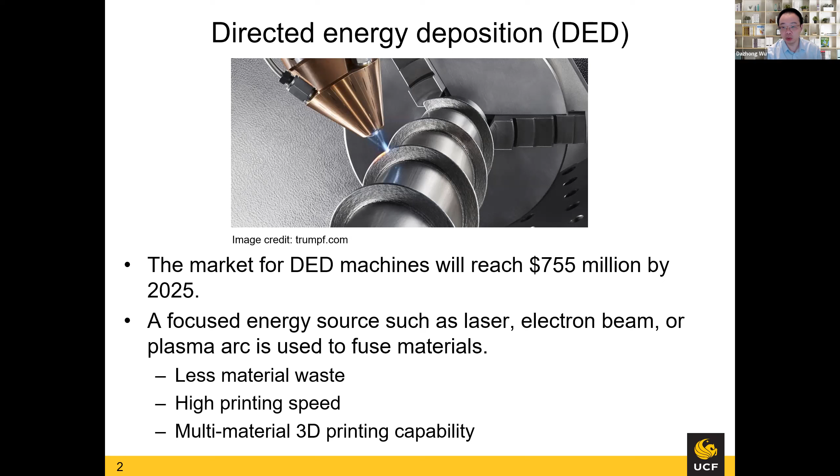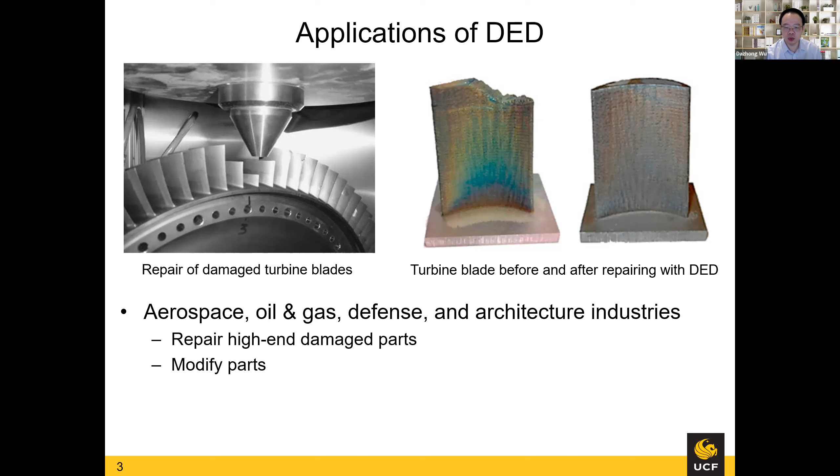There's a wide range of applications of directed energy deposition process. There are several industries where this process has been heavily or extensively used, including aerospace, oil and gas, defense, and architecture industries, because this process can repair very high-end, expensive, damaged parts, such as turbine blades, as you can see from these figures, before and after repairing with directed energy deposition. Also this technique can be used to modify parts more effectively and efficiently.

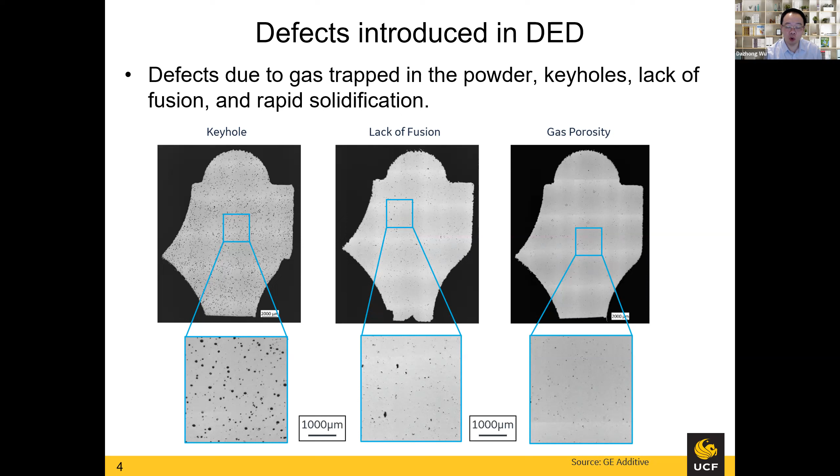However, there are also some disadvantages of this technology. For example, similar to other metal additive manufacturing processes, the DED process will introduce defects due to gas trapped in the metal powders, keyholes, lack of fusion, and rapid solidification. As you can see from these SEM images, sometimes even pretty large voids are introduced by this process.

As I mentioned before, these defects are affected by a so-called melt pool formation process during the DED process, such as melt pool temperature. This melt pool refers to the spherically shaped area in the vicinity of the laser and the metal or material interface, and there are several challenges associated with this process.

One challenge is that traditional or conventional physics-based models, such as finite element analysis, which you might be pretty familiar with, are usually not accurate enough to capture or detect these defects introduced by this process, due to the very complex heat and mass transfer phenomenon within a melt pool.

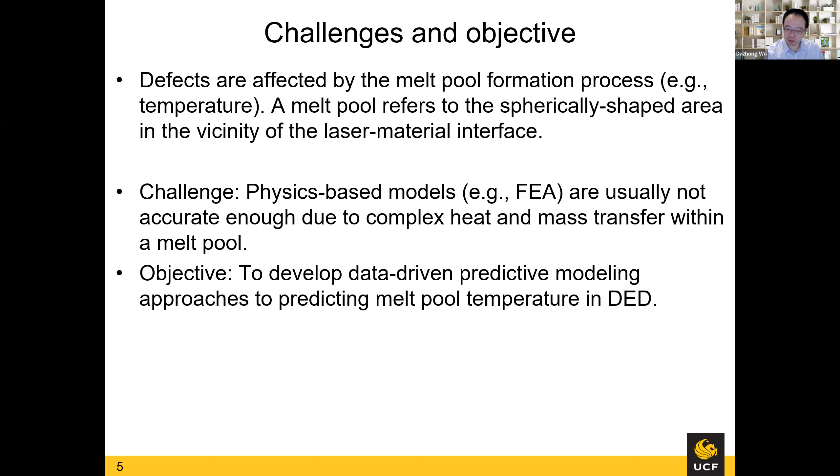Our objective for this project is to develop machine learning algorithms or data-driven predictive modeling approaches to predict melt pool temperature in real time. So I will briefly talk about two algorithms, machine learning algorithms we implemented and tested for this research.

The first one is called extreme gradient boost, or XGBoost. This is actually a tree model, so we grow hundreds or thousands of decision trees. These decision trees help us predict melt pool temperature, and this melt pool temperature will significantly affect defects, as I mentioned before.

The second algorithm is one of the deep learning algorithms. The previous one, XGBoost, is actually a machine learning algorithm. Long short-term memory, or LSTM, is one of the most effective deep learning algorithms. We chose to implement LSTM because it keeps track of long-term dependencies in time series data. The sensor data we collected is actually time series data. That's why we chose this deep learning algorithm rather than others, like CNN, convolutional neural network.

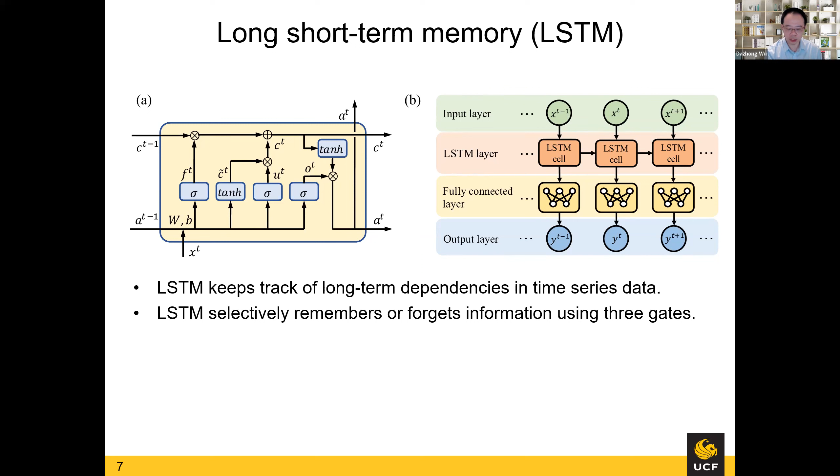We fabricated several specimens, so-called thin-walled structures, using this DED machine. The raw material of these structures is a nickel-based alloy, Inconel 718, which is very common in industry, and the substrate material is low-carbon steel. You can see from this figure the build direction from bottom to up, and also the implemented zigzag two-pass strategy.

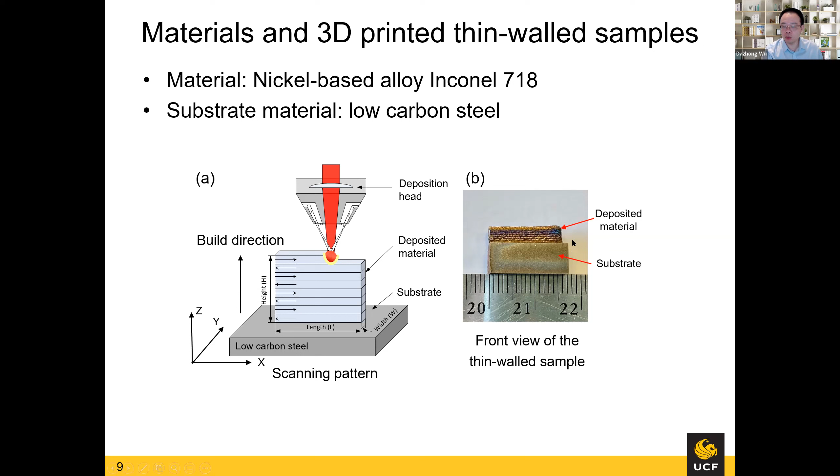In order to reduce the total number of experiments, we only varied these two key parameters: laser power and scan speed. These are the most important parameters that affect printing quality, which is why we only varied these two parameters.

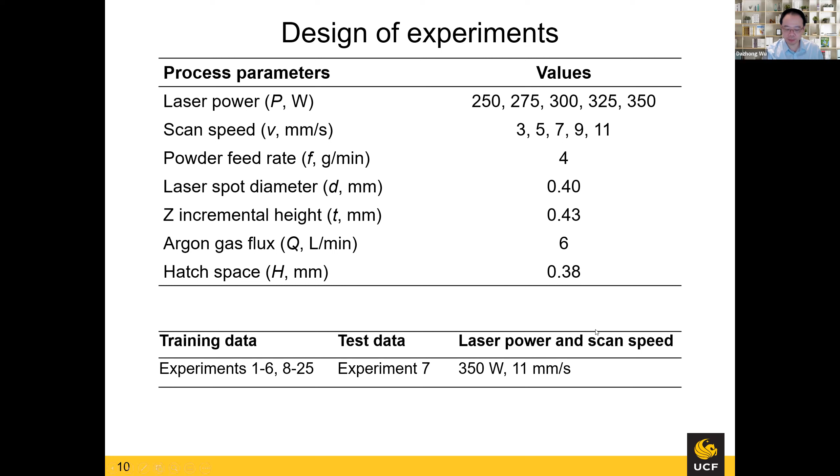We used 24 data sets to train our machine learning model, and then tested and validated the accuracy of this model using the remaining 1 data set, as you can see from this table at the bottom. And here are the experimental results.

Further, we quantify the prediction accuracy for these two algorithms in terms of root mean square error, RMSE, and mean absolute percentage error, MAPE. These are the two commonly used error metrics to quantify the accuracy of a machine learning algorithm. Further, we want to quantify or evaluate the training efficiency of these two algorithms and see how long it will take to train effective machine learning models.

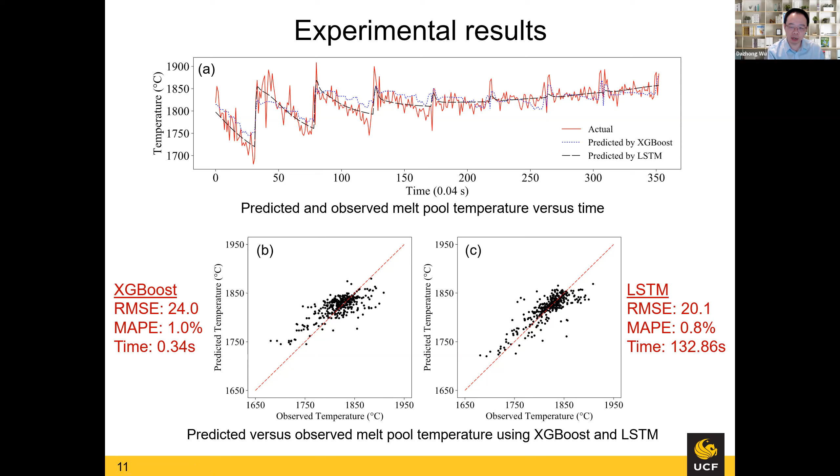If you take a closer look at these two figures, we plotted the predicted temperature versus observed actual melt pool temperature using these two algorithms, which is slightly different from the first plot. In terms of training efficiency, this deep learning algorithm, LSTM, takes longer time than XGBoost, although the prediction accuracy is slightly better or higher than XGBoost. So there's some trade-off you need to balance when you choose the right machine learning algorithm to train your model.

We further compared our prediction accuracy with state-of-art methods reported in the literature. Here I only list 3 references: a closed-form analytical model reported in reference 1, a finite element model, which is numerical, reported in reference 2, and another deep learning algorithm, convolutional neural network, CNN, reported in reference number 3.

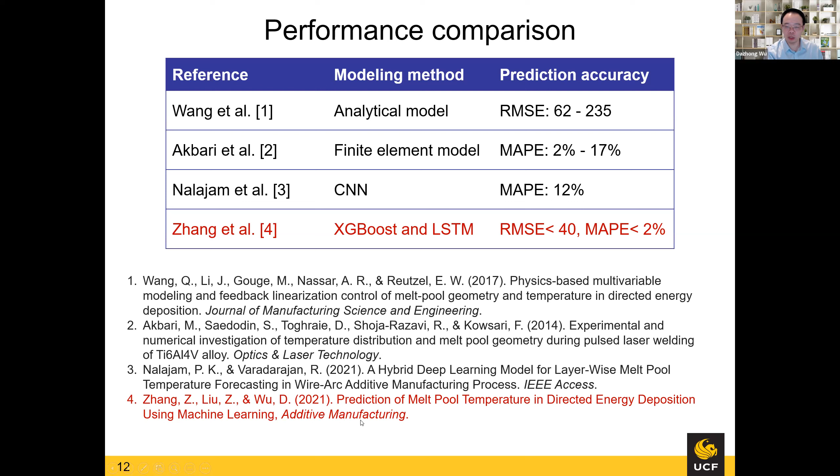If you compare their prediction accuracy in terms of RMSE and MAPE, our results are actually better. Our machine learning models outperform the analytical model, the numerical model (FEA), and the deep learning algorithm. If you're interested in more details, you can search for this paper, download it, and take a closer look at these two machine learning algorithms and our experiments.

To briefly summarize the first project we completed at UCF: this is the first study to demonstrate that machine learning and deep learning models can predict melt pool temperatures with pretty high prediction accuracy in terms of mean absolute error, RMSE, and MAPE. Both algorithms outperform physics-based models, which is an analytical model and a numerical model, finite element model, as well as a deep learning algorithm reported in the literature.

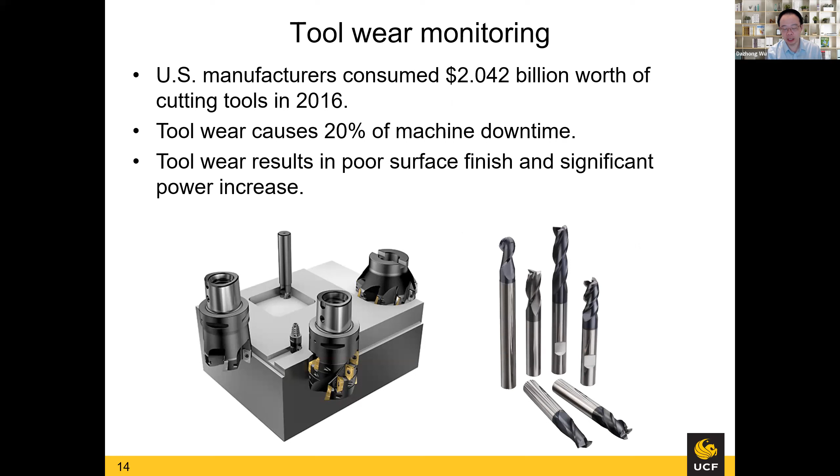The second project I want to talk about is tool wear monitoring or prediction. The reason we worked on this project is because US manufacturers alone consume almost 2 billion dollars worth of cutting tools every year, and tool wear causes a lot of issues, such as almost 20% of machine downtime being due to cutting tool wear. Tool wear also results in poor surface finish and a pretty high power increase.

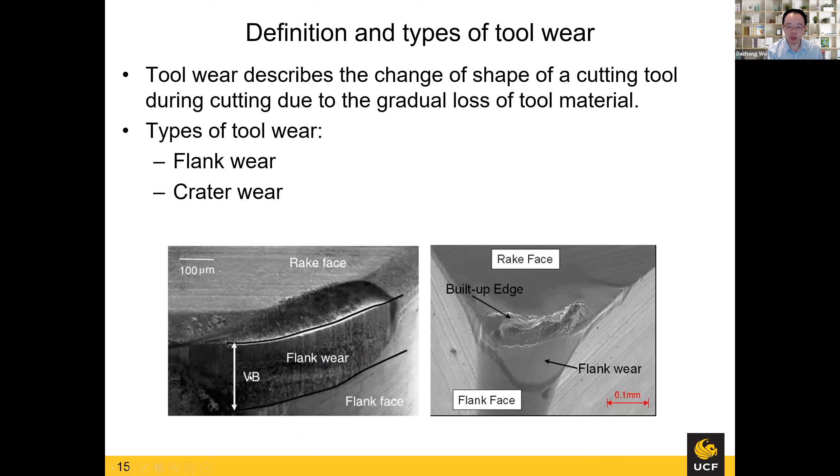In this project, our goal was to predict cutting tool wear in the milling operation using a so-called cloud-based parallel random forest algorithm. Random forest is one of the most powerful machine learning algorithms. We further improved this algorithm by parallelizing it in order to improve training efficiency, or in other words, reduce training time.

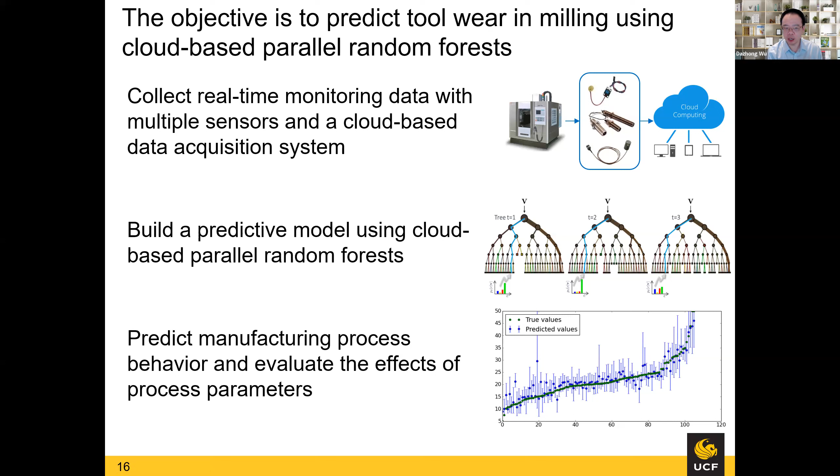We first collect real-time monitoring data with multiple sensors from a CNC machine, then store this data in a cloud system remotely. Then we build a predictive model using the cloud-based parallel random forest algorithm—basically still a tree-based, or decision tree-based, machine learning algorithm. Then we predict manufacturing process behavior and evaluate the effects of different process parameters to see which parameter may significantly affect wear.

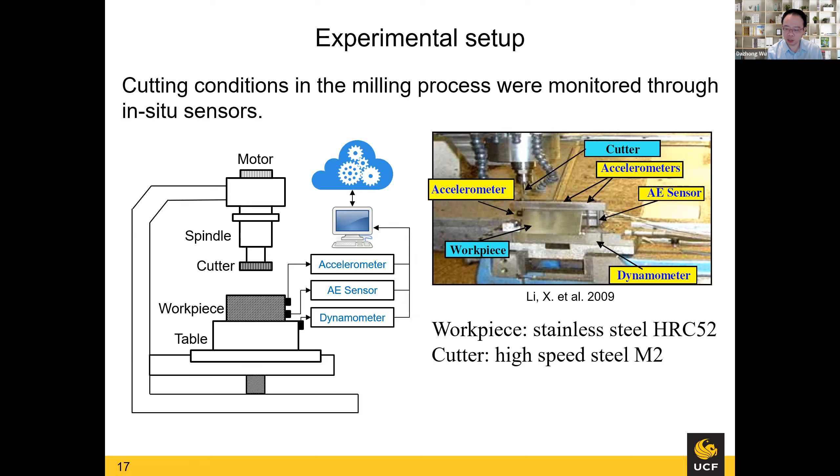Here's our experimental setup. We installed 3 types of sensors on a 3-axis CNC milling machine. You can see from the figure on the left a schematic diagram of the experimental setup, and on the right the actual experimental setup. These 3 types of sensors include accelerometer, acoustic emission sensor, and dynamometer. The workpiece material is stainless steel, and the cutter is high-speed steel.

The dynamometer was used to measure cutting force, the accelerometer was used to measure vibration, and the acoustic emission sensor was used to measure the acoustic emission formed during the milling process.

The total raw data we collected is about 9 gigabytes from over 300 cutting tests, and the total time spent collecting this data is a little over 100 minutes, with a sampling rate of 50 kilohertz per signal channel. In other words, every single second these sensors generate 50,000 data points, a pretty high sampling frequency—so we collected pretty large datasets within a relatively small time window.

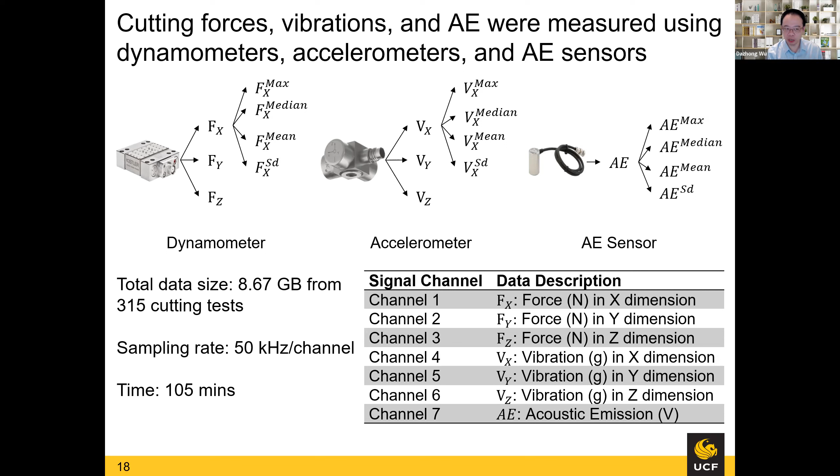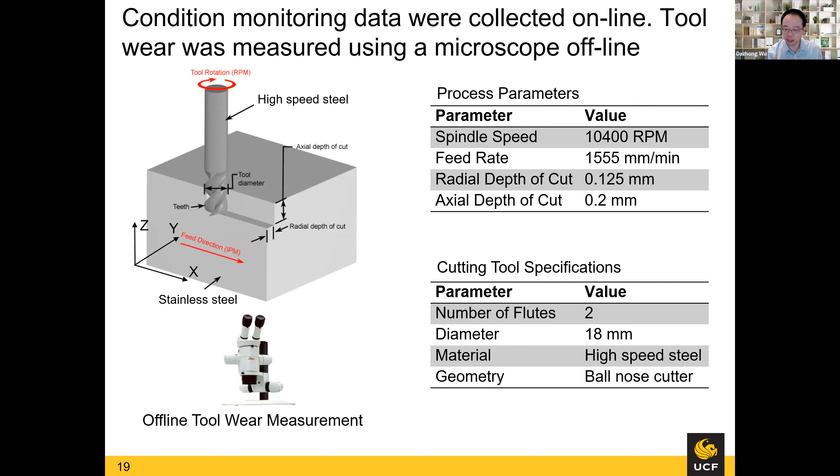Here we implemented the original random forest algorithm and evaluated its prediction accuracy in terms of MSE, mean square error, R square, and training time. For MSE, the smaller the better, and R square ranges between 0 and 1—the closer R square is to 1, the better. You can see we plotted the predicted cutting tool wear versus the observed wear.

If all the black dots fall onto this 1-to-1 straight line, then it's a perfect prediction, 100% accuracy. In this case, we observed some prediction error, but it's very small. And if you look at this R square, which is very close to 1, that means the performance of the random forest algorithm is pretty good.

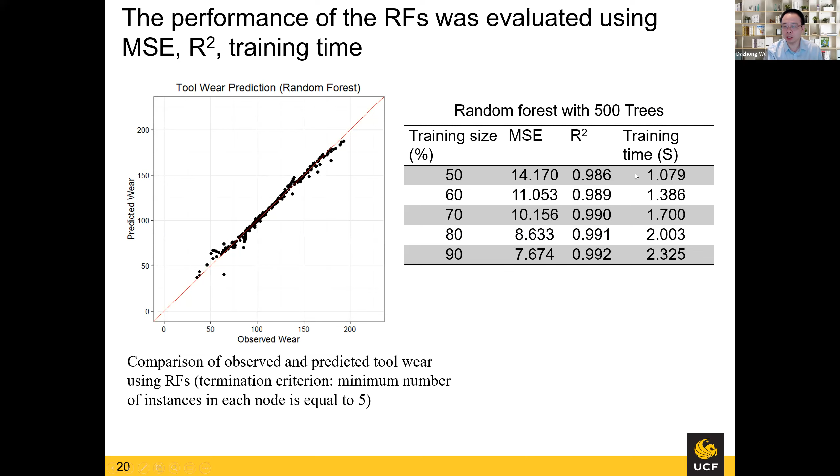The training time is also acceptable, ranging between 1 to 2 seconds. And then we want to further quantify prediction error or prediction uncertainty.

There's always error associated with your prediction, but how large or how uncertain these predictions might be? We further quantified or created a so-called 95% prediction interval for each particular predicted data point. We plotted the predicted values along with the prediction interval so that we have a better idea of the uncertainty associated with each prediction.

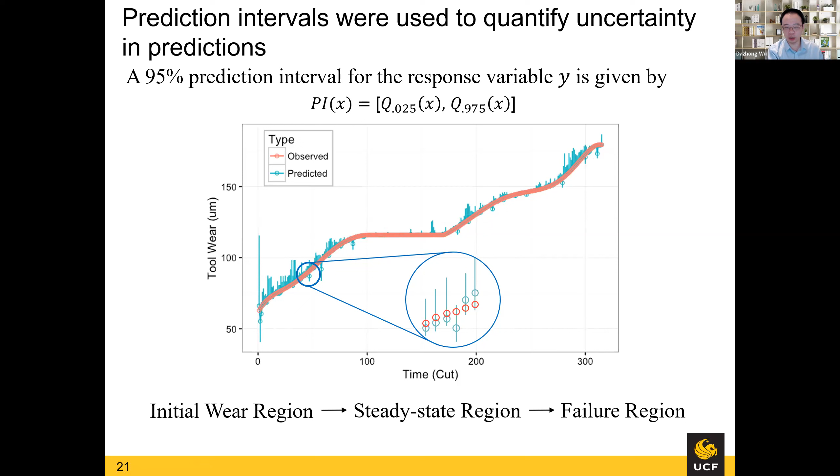We also observed an interesting phenomenon across the entire cutting tool life: an initial wear region, a second steady-state wear region, and a third failure region. For the first and third regions, we observed pretty high wear rate, as you can see from this curve. In the middle, the steady-state wear region, we observe a pretty much constant wear rate, which is very consistent with what we observe on real-world factory floors.

We further quantified the effect of different manufacturing parameters on wear, so that if you want to control wear, you'll be able to find the most important parameter to control. We calculated a so-called feature importance score or index. The larger the index, the more important the feature is, meaning it will significantly affect cutting wear.

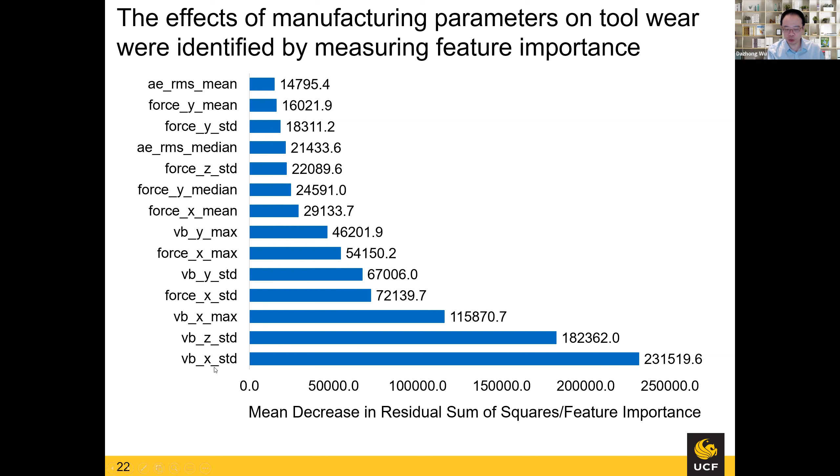We ranked all the features we extracted from the raw signal, and the most important parameter or feature turned out to be the vibration in the x direction.

Then we wanted to compare the performance of random forest with two other machine learning algorithms. One is called artificial neural network, or ANN. For this neural network, the performance is actually worse than random forest in terms of MSE and R square. The training time is pretty much comparable to random forest, ranging from 1 to 2 seconds, but the spread of the black dots is wider, meaning the error is larger than random forest.

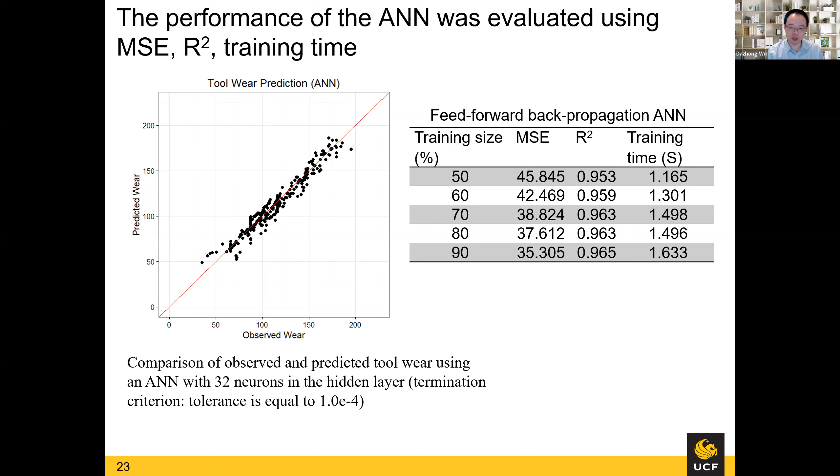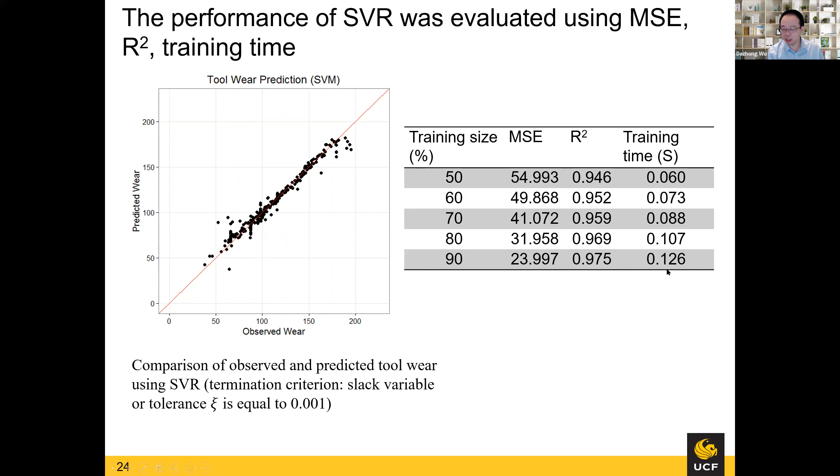We also compared random forest with another machine learning algorithm called support vector regression, acronym SVR. We quantified the performance of SVR in terms of MSE, R square, and training time. Interestingly, the prediction accuracy is lower than random forest, but the training time is also significantly smaller. In other words, SVR is more efficient, taking less than 0.1 second to train a model. Now let's put all the results together to compare the three algorithms: random forest (RF), artificial neural network, and support vector regression.

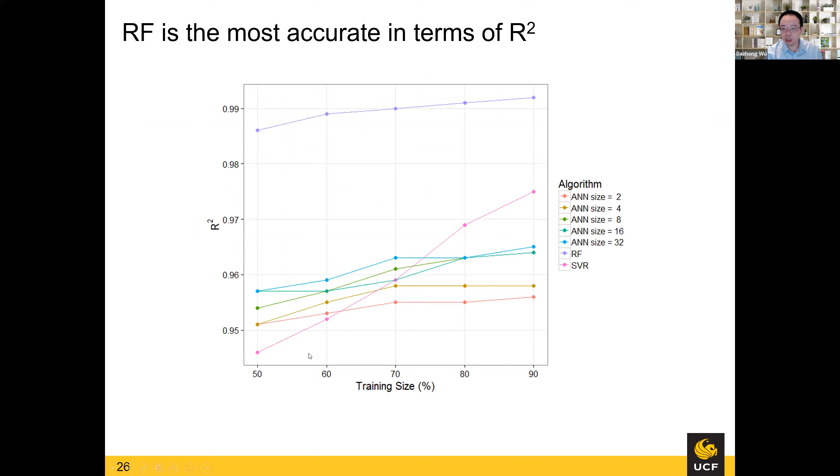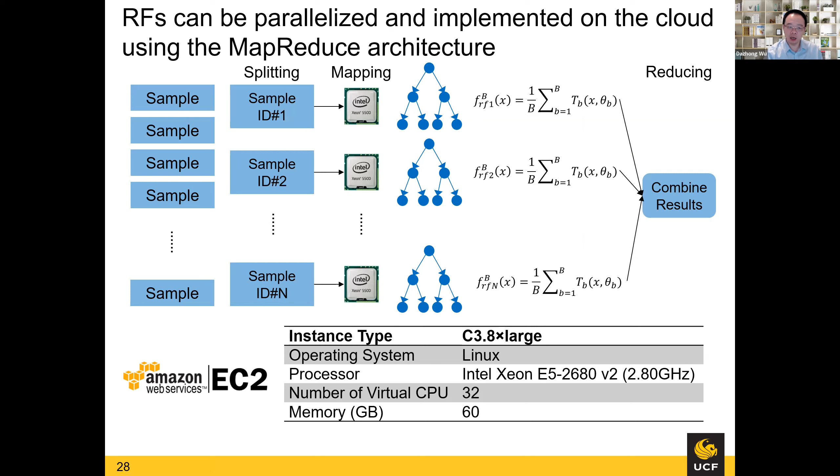For example, in this case, we used 32 virtual CPUs rather than a single CPU, to see how fast the algorithm can run. Here you can see the parallel computing results: as we increase the number of CPU cores, the training time reduces. Of course, it's not a linear relationship between the number of CPU cores and the algorithm speed up. This is due to a well-known law in parallel computing called Amdahl's law. Very few parallel algorithms can achieve linear speed up.

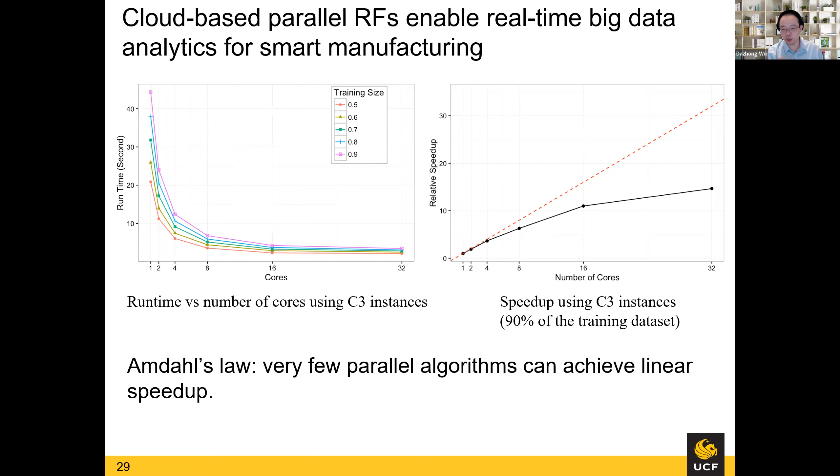But here you can see the figure, the plot on the right, we achieve pretty much a very good, almost linear speed up until we use 16 CPU cores. And then even after we start using 32 CPU cores, we can still further reduce training time, but not significantly in this case.

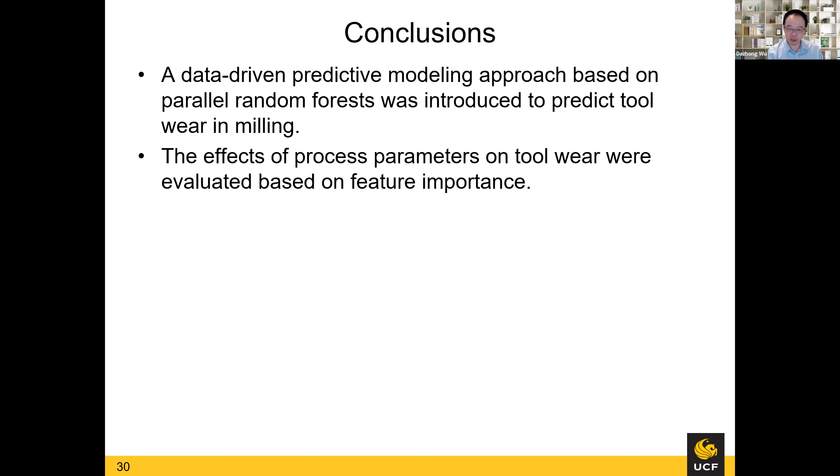But the conclusion is we actually implemented three machine learning algorithms and parallelized one of the algorithms called random forest in order to build a model to predict tool wear in milling operations. And also we further identified the effects of various process parameters on tool wear in order to actually identify the most important features that can affect your tool wear.

This is the end of my second study.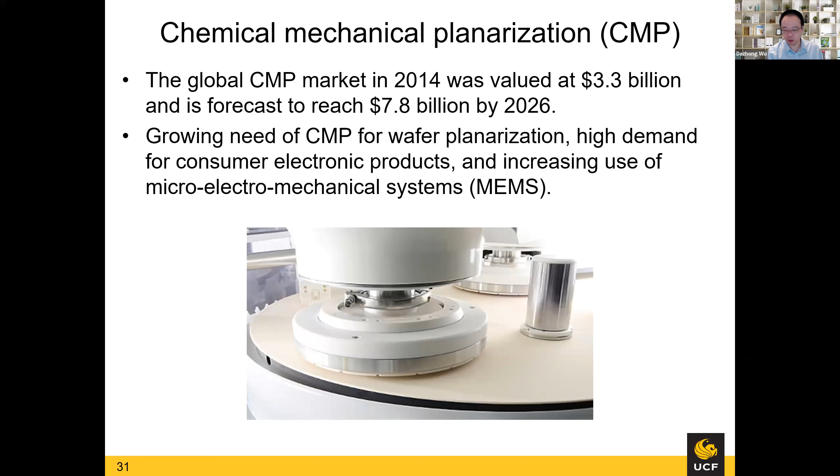And this is one of the figures actually showing you the actual CMP machine. The CMP process or technique is quite complex, and it smooths the surface of a wafer with a combination of both chemical and mechanical forces. That's the reason why this is a pretty complex process and very difficult to control in order to achieve high polishing quality. In this process, CMP has been applied between deposition and patterning processes in order to remove excess materials and eventually to maintain the flatness or uniformity of a surface.

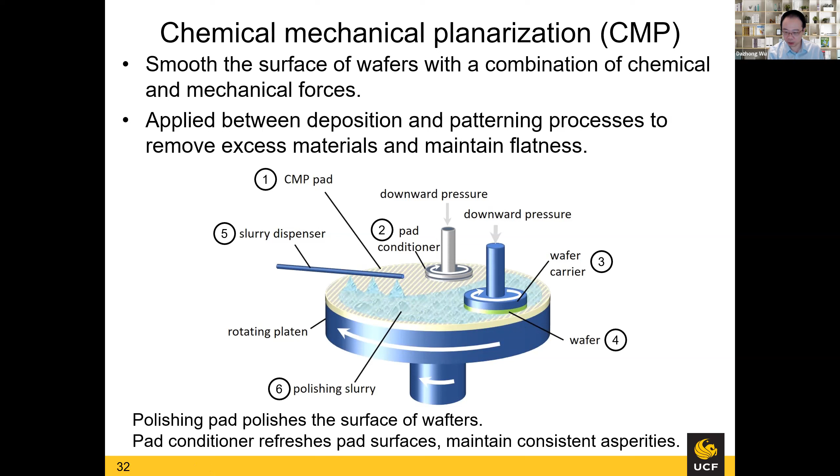There are several challenges associated with the CMP technique. The quality of the CMP process depends on multiple process parameters or variables. As I mentioned before, these process variables include polishing pressure, the downward polishing pressure you apply to this pad conditioner and also this wafer carrier, and also relative speed between the wafer and the polishing pad, the surface morphology of your polishing pad, and also slurry flow rate and the type of slurry you will be using. These are the most important process parameters, but not all of them. I only list four of them.

So the objective of this research is to develop a so-called physics-informed machine learning approach that can predict material removal rate by combining machine learning and physics-based models. The reason why we want to predict material removal rate is that it is actually a very important variable to predict in order to achieve very high polishing efficiency.

And I want to highlight the importance of physics-informed machine learning. You might be familiar with machine learning, and you might also be familiar with physics-based models. But here we try to combine them in order to achieve a better prediction. Because as a mechanical engineer, I assume most of you guys are mechanical or manufacturing engineers, we learn a lot of domain knowledge from our textbooks and research papers. So actually it doesn't make sense for us to just throw away that domain knowledge and simply implement machine learning algorithms or artificial intelligence. I think the ideal case should be able to leverage domain knowledge, such as some closed-form governing equations behind manufacturing processes, and then integrate this domain knowledge with machine learning techniques.

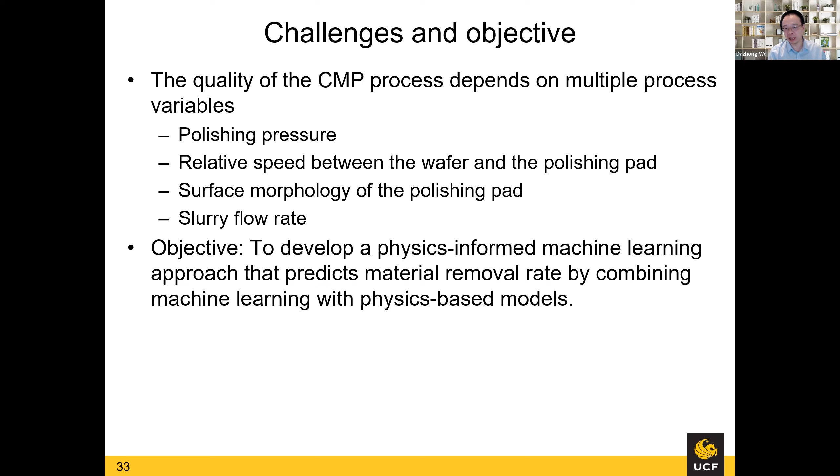So that is the motivation, and also I think the benefit of this approach. Here, very briefly, I want to talk about this idea. I won't be able to cover all the technical details because of limited time, but the idea is here. We first actually developed a closed-form physics-based model that governs this chemical mechanical polishing process. These physics-based models actually involve the CMP kinematics and also this so-called contact mechanics, as well as a single abrasive removal model. By combining these, or considering these three models, we developed a closed-form physics-based material removal rate model. However, in this model there's an unknown term.

Physically, this term represents the polishing pad morphology, as you can see here. This term is difficult to measure physically, and typically people use very traditional statistical methods or empirical methods to estimate the value of this pad morphology. This will introduce pretty large error for this physics-based closed-form model.

So our idea is to use machine learning techniques, in this case random forest, to predict or estimate the value of the pad morphology term, and then substitute the value of this unknown term back into the physics-based model. This is how we combine physics-based models and machine learning algorithms.

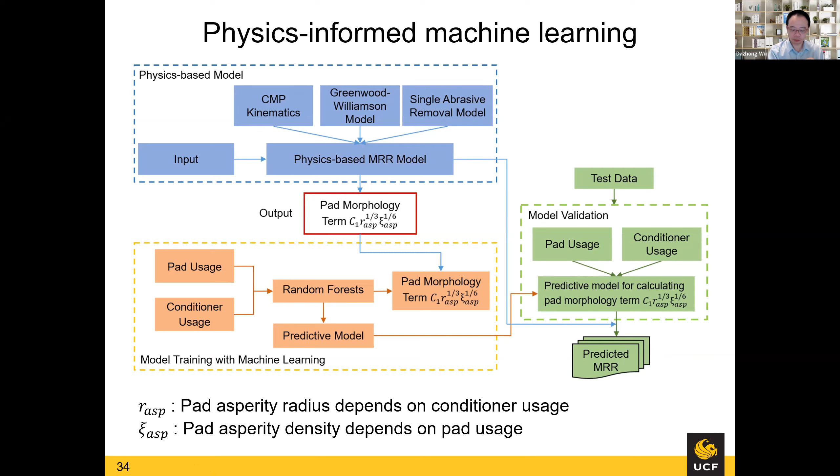So let's look at our experimental results. We generate training and test data using almost 2,000 wafers, and we plotted the material removal rate versus the sample index. We used over 350 wafers to test or validate our machine learning model.

We further quantified the prediction accuracy in terms of mean square error, root mean square error, and relative error. We achieved about 11% relative error, which is pretty good in this case. But overall, the prediction accuracy is not as good as the previous two examples, because the raw data in this particular case involves quite large noise, so the prediction accuracy is relatively lower.

But in general, this is still way better than conventional physics-based models, because when you estimate certain unknown parameters in the closed form equations, you will introduce pretty large error as well.

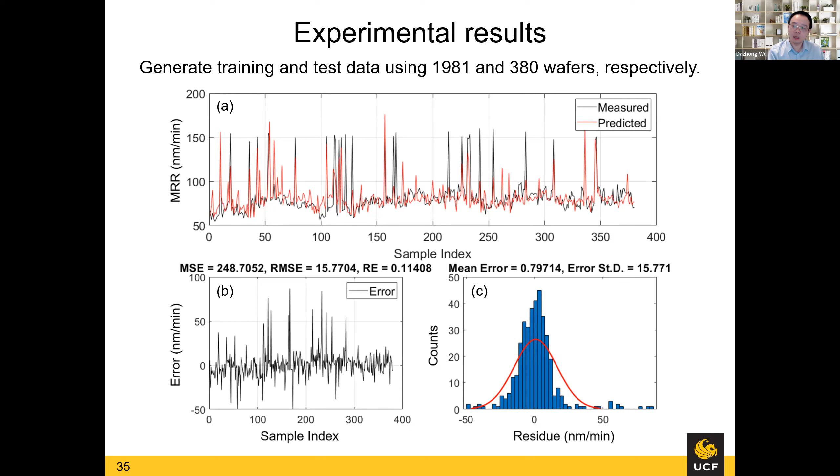So then we again want to compare our model with other methods. Here we compare with a very conventional physics-based model called the Preston equation or Preston model, reported in reference 1, published in 2017. The RMSE of this Preston model is 29.5, and our physics-informed machine learning model achieved an RMSE of 15.8, which is almost half of the other model's prediction error.

If you are interested in all the technical details about how we combine physics-based models with machine learning, and also the experimental setup about these chemical mechanical polishing experiments, you can download this paper from the journal and take a look at all the technical details.

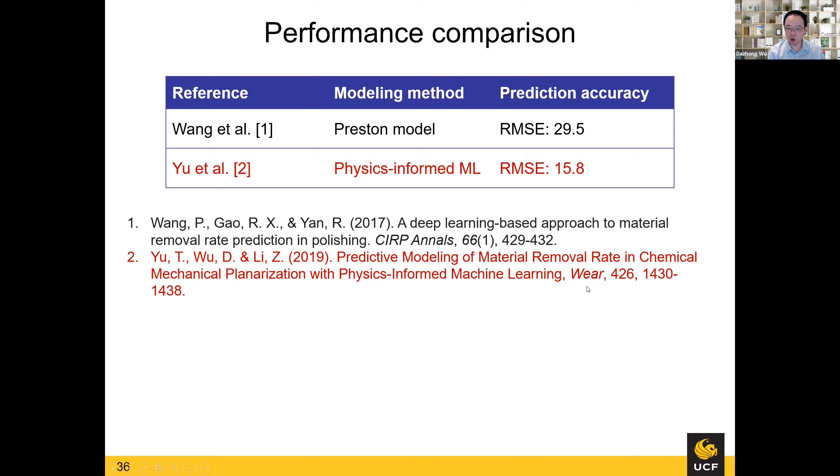Let me briefly summarize the third and last project. We developed a new physics-informed machine learning technique to build an explainable model by combining the underlying physics with machine learning. It's more explainable because we involved the physics behind this chemical mechanical polishing process, rather than using a black box type of machine learning technique.

These physics-based models were built on kinematics, contact mechanics, as well as a single abrasive removal model behind the CMP process. And this physics-informed machine learning technique achieved pretty high prediction accuracy in terms of RMSE and mean absolute percentage error.

I think that's pretty much all I prepared for today's seminar. I'm not sure whether we still have time for questions. Yes, we actually do have some time for a couple of questions, about 8 minutes left. I have a couple questions, I don't know if anyone else does out there.

Anybody want to? Yes, there's a question in the chat box from Mike Lisaki. Okay, yeah, I see a question from Michael: can the CMP model also predict across-wafer planarity? I think that's important.